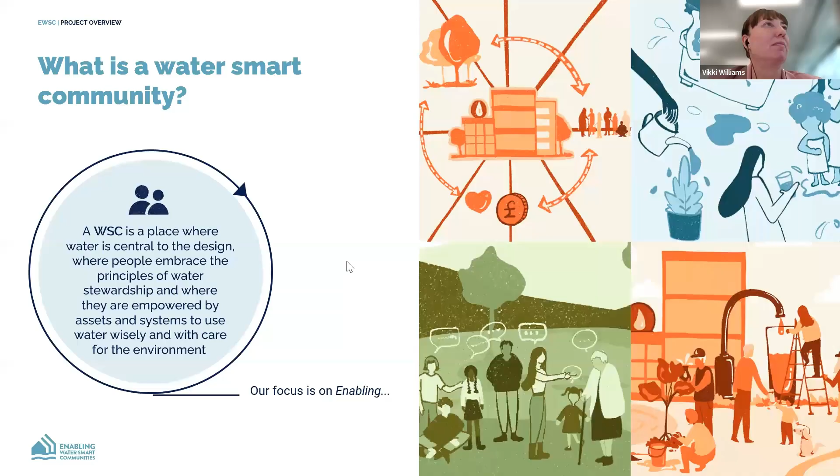I always want to say what is a water smart community, and it is about placemaking. And what we want to do is to ensure that water is central to design and how we embrace the principles of water stewardship in new housing development, and that we can get empowerment across the assets and systems. We want people to use water wisely, and we also want to take care of the environment. And the focus of the work we've been trying to do is on enabling. So this project has also been setting out the direction and action that we want to take to ensure that we can get water smart communities happening through the whole of England and Wales.

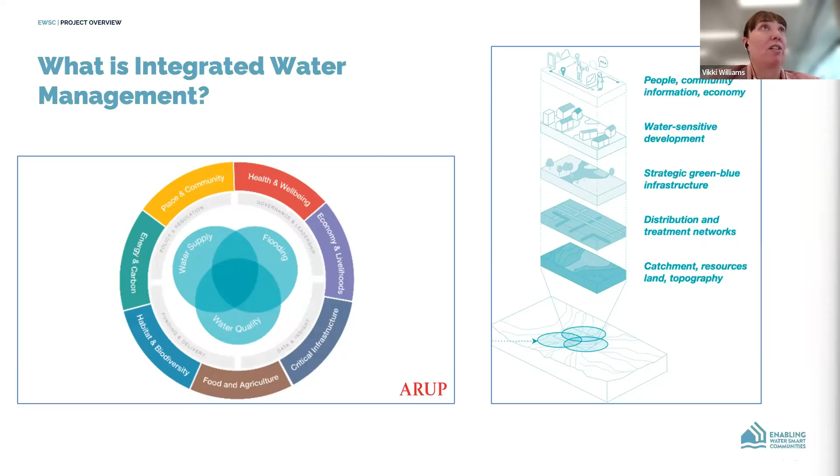The session today looks very much at the distribution network system here, and it's often the hidden and unloved part of the network, but we want to bring it out and give it the most love and say, why should we look at the new future of design in water networks and wastewater networks? Because lots of our talk is about how we must be much more water efficient, and we can't have water efficient homes that are going down to very, very low efficiency without completely looking at the design of our networks. And that's the aspiration of the project. And now I'm going to hand over to Olivia to talk about the work that we've done.

Yeah, hi everyone. Thanks for coming. So I led the first phase of this work that was based around sewerage, and that was concluded about 12 months ago. And then Liliana will talk about where we've come since then.

So next slide, please. So I'll start with the problem statement that we were tackling. So we know that widespread water efficiency measures will impact wastewater quality, wastewater composition, solids loading, nutrient loading, wastewater temperature, but those planning water efficiency measures have little understanding of the impacts that this will have on sewerage infrastructure downstream. So that includes things like blockages, stagnation, treatment efficiency.

And so the tools and knowledge for assessing these impacts have been made available through academic research, but we found that it was not in a form that would make it easy to use by the water industry. So that's what we were really aiming to solve with this project. So we aimed to solve this by making the existing research and tools more accessible, working with users to ensure that the tools delivered actionable insights that could really help them do their jobs well.

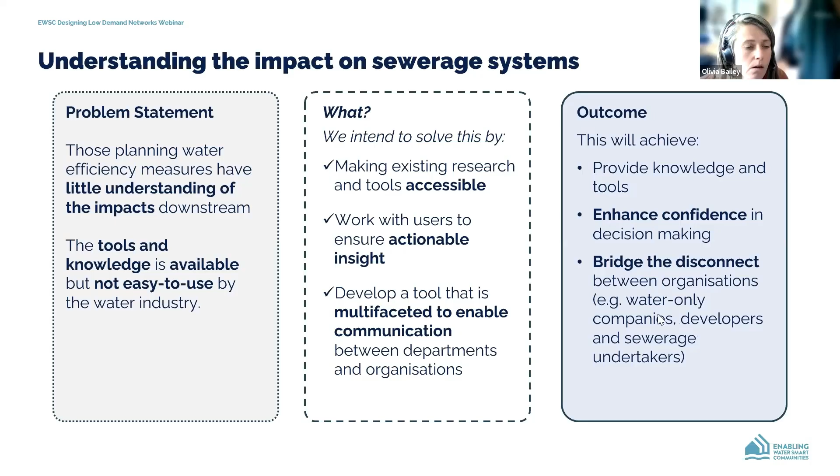So we had three main outputs from the ARUP work streams on this. We also worked with Thames Water, who worked more on the treatment efficiency impact, but these were our work streams.

Firstly, we produced a pamphlet that serves as an easy access guide to the existing research on this topic, so that's really the gateway if you're new to the topic. Then we also produced a network model that's open source - this was the conversion of an existing tool that was in MATLAB. Obviously MATLAB needs an expensive license and might be difficult to use for some people, so we converted it into Python, which is freely available open source software. I'll talk more about that later.

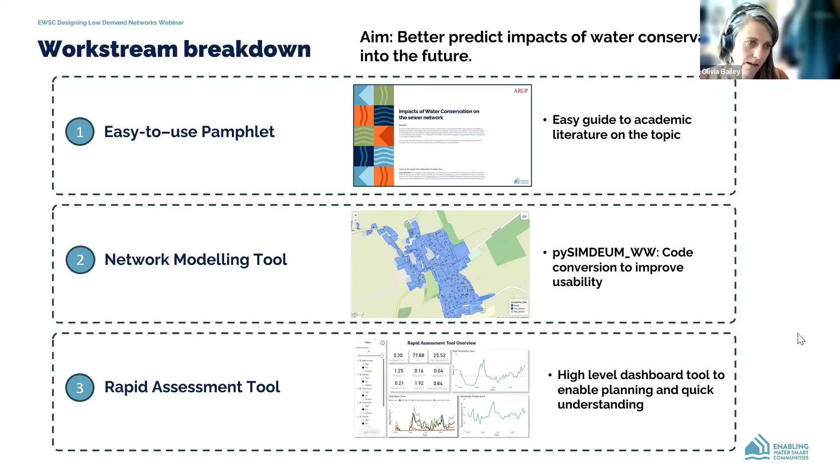And then we also created a rapid assessment tool for high level assessment of this issue. So it's a static output of the first tool, but for people that may not be modelers by background.

So I spent my PhD exploring this topic and published 3 papers in this field. There are also many others who have published work in this space, including Liliana, who will speak next. But we realized that this knowledge was locked up in academic literature behind paywalls and not very accessible to practitioners. So this pamphlet provides a really accessible starting point to help users look at the impacts of water conservation on sewer networks.

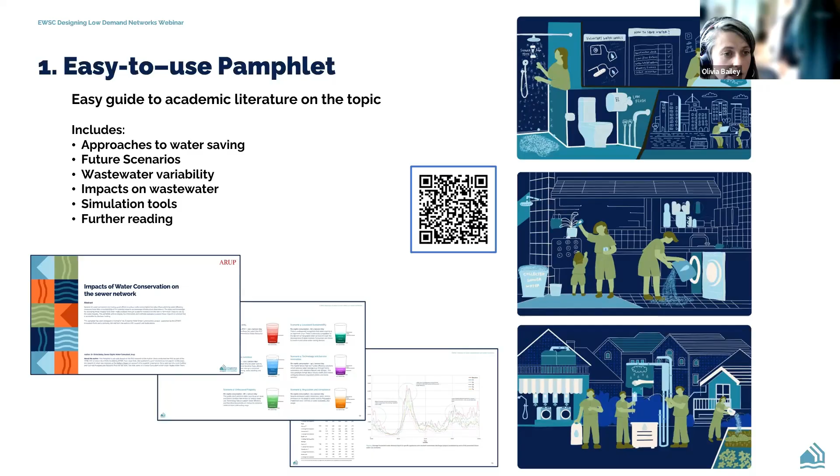This is just a little list of the sections included. We outline some approaches to water savings, look at 5 future scenarios, outline how variable wastewater is from different appliances with those scenarios, and then look at an example network to see what the impacts are on wastewater for those scenarios. It also has a section outlining the simulation tools I'll talk about next, and there's a list of literature for further reading. Hopefully this will be a really useful resource, and I encourage you to take a look. There's a QR code, and it's available on the Enabling Water Smart Communities website.

So the network modeling tool that we developed is called pySIMDEUM. It's basically the Python version of SIMDEUM, a software developed by KWR, a research institute based in the Netherlands. This originally was built in MATLAB, and it's a tool to simulate water use patterns down to very small temporal scales, down to 1 second, and small spatial scales, down to a single appliance. It's a bottom-up model for water demand - based on population statistics and the way people use water, it builds up a flow pattern rather than being based on monitoring in the catchment and global assumptions across populations.

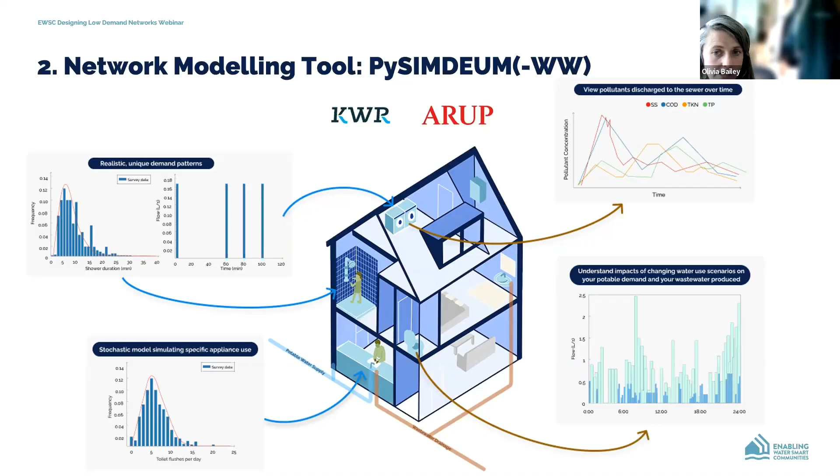For my PhD, I developed the wastewater extension to this software, SIMDEUM Wastewater, which allows the creation of appliance-specific wastewater discharge patterns. This is more accurate when looking at future changes, as you can target specific appliances - so you can look at the impact of switching to low flush toilets or low use showers, for example, and see how those specific appliances change your profiles. This software can form the input to network models - we used InfoWorks ICM, for example, to observe impacts in the network. As I said, these were MATLAB-based tools, and through this project we completed the conversion into Python, as well as some user improvements to make the tool more accessible for practitioners.

So pySIMDEUM is now available through GitHub, and it's completely open source, allowing you to simulate probabilistic water demand and discharge at end use level.

Based on population and use statistics, you can build and populate households suitable to your region or scenario. There's also some default data if you just want to play around. The model simulates flow down to an appliance level, so it can provide information on wastewater quality. For example, at 7 a.m., the primary water usage is everyone going to the toilet, and therefore water quality present in the network can be associated with usage at that time throughout the day.

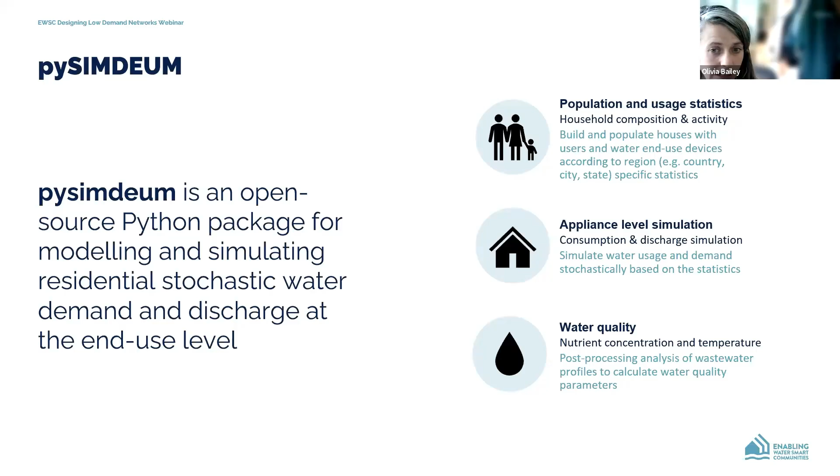SIMDEUM Wastewater serves as the input to InfoWorks ICM, or another network model if you choose, and the impacts can be viewed in the network.

We've developed functionality that can read in your shape files with specific population statistics and property groupings, and simulate catchment level flow patterns that match your data. So you don't have to go house by house. It can integrate well with your existing methods.

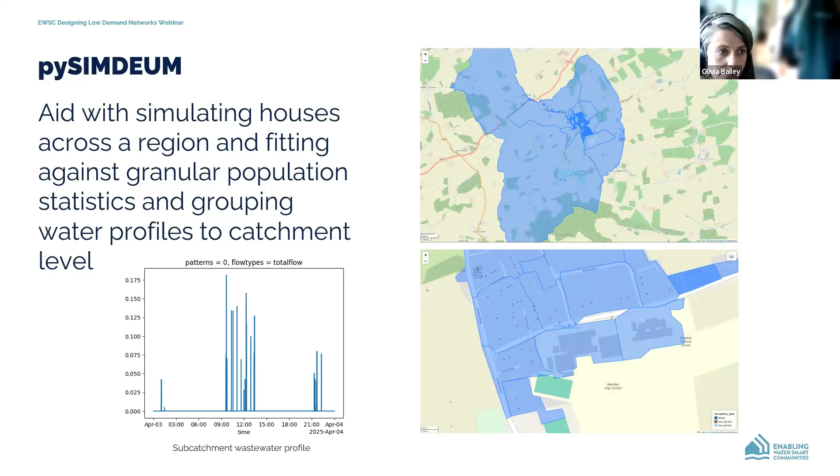The final tool I'll speak about is the rapid assessment tool, a high level version. It gives a high level overview of how reducing water use might impact flow in small developments. It's a simple dashboard tool that uses a static output of PySimDEUM that can be overlaid.

You can visualize key information based on what you're interested in. This tool is primarily to support go, no-go decision making and investigation without the need for in-depth network modeling. So you can quickly see how switching to 1 liter flush toilets, for example, would impact your flow pattern throughout the day.

It's intended for this tool to support pre-planning conversations between, say, a water company, developer, or water-only companies. Because we intended this tool for people who deal with water but might not be water professionals, we had to make it really easy to use.

The parameters we included were informed by user testing, so hopefully it includes really valuable parameters that can support the conversations and investigations these people need.

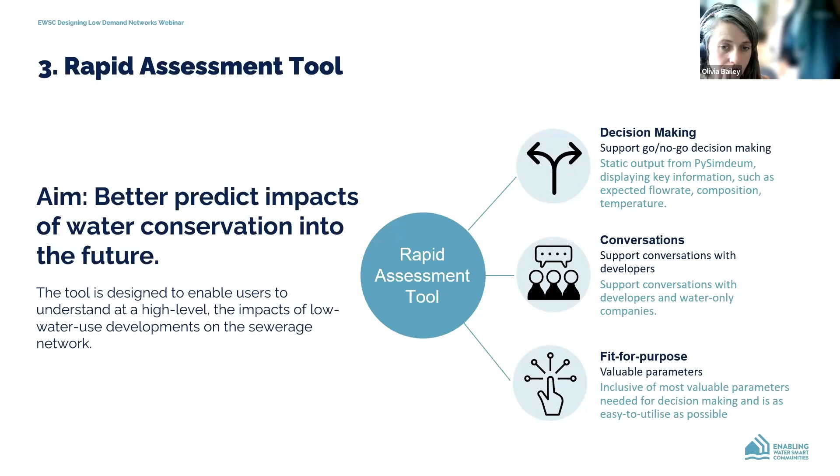This is my last slide, and it shows what the tool looks like. You can see we've created high, medium, and low impact scenarios for each household appliance. This means you can easily investigate impacts of changing appliances on your flow pattern, pollution concentration, and water discharge temperatures.

These three scenarios for each appliance were simulated with PySimDEUM, and there's a static output here in the dashboard. On the left-hand side of the screen there's a toggle, so you can choose for each appliance how dramatic you want your scenario to be.

So if you want a big impact on your shower flow, but leave your dishwashers the same, you can choose what you want to look at, and then you see that reflected in the profiles on the right.

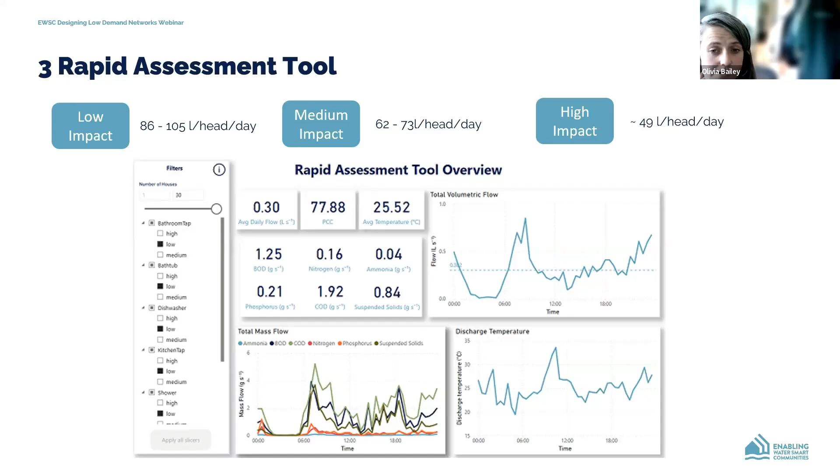Hopefully that gives a flavor of the three outputs from the first part of the project. As I said, they're all freely available on the Enabling Water Smart communities website, so please go and have a look.

Now I'll hand over to Ljiljana, who's going to talk a bit more about the recent phases of the project. Thank you very much, Liv, especially for explaining SIMDEUM and PySimDEUM. Now moving into the second part of this webinar, I would like to focus on designing low demand networks.

To start with, some quick numbers on the wider context. The UK is projected to face a major water supply gap by 2050, a gap of 4 to 5 billion liters per day. Climate change is also expected to put significant pressure on summer river flows, especially in already water stressed regions such as South and East England. On the other hand, around 1.5 million new homes are planned by 2029, and many of those are actually going to be built in already water stressed areas.

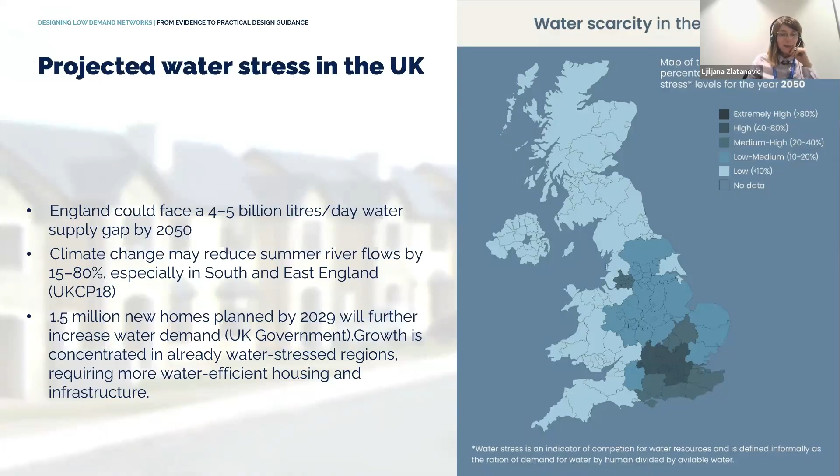So the mathematics is not that difficult. We need to save water somehow. One of the most effective ways to close this future supply gap is actually reducing household water demand, because homes represent the largest controllable water use sector.

At the moment, households in the UK use 140 to 155 liters per person per day. There is also a new UK policy aiming for a 20% reduction in household water use by 2037, meaning homes will use less water than today. That's positive for water stress regions, but it creates an important engineering challenge, because our drinking water and sewer systems are currently designed assuming much higher flows. The key question becomes: how will our infrastructure perform when demand becomes significantly lower?

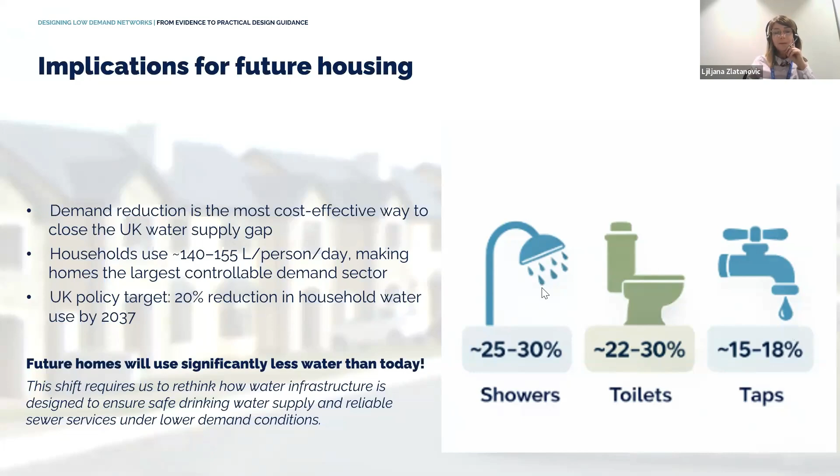So to address that question about how our infrastructure will perform, this project followed four main steps. First, we conducted a literature review on water conservation, looking at demand reduction, water efficient technologies, appliances, and future conservation trends.

Second, together with a wide range of stakeholders, we used knowledge from the literature review to develop future water conservation scenarios to be modeled. Third, we used hydraulic modeling to test how water networks behave under these current and future scenarios. And last but not least, based on the modeling insights, we came up with guidelines on how we should actually design low demand developments.

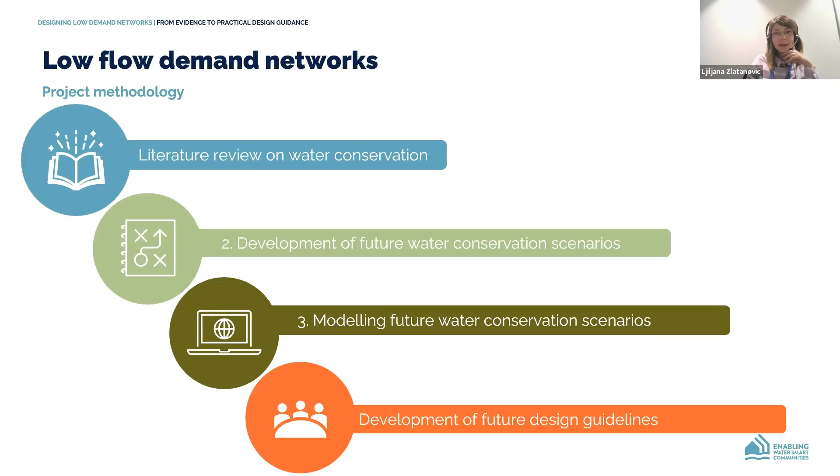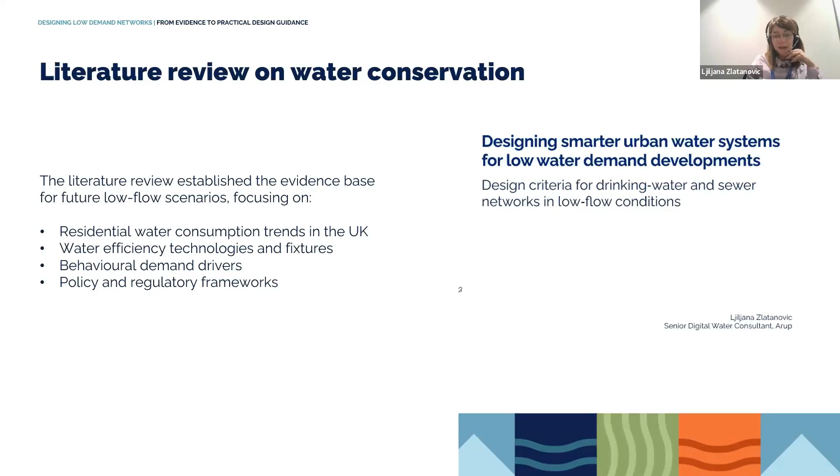The first step of the project was to build an evidence base. We reviewed scientific literature, but also industry reports, focusing on appliances and technologies like low flow showers, efficient washing machines, and dual flush toilets. We also touched upon behavioral drivers of water demand reduction, and reviewed policies and regulatory frameworks, including government targets for water efficiency and future demand reduction. That review helped us define future demand scenarios together with our project partners and stakeholders.

Next, we examined how drinking water networks are currently designed. In principle, the primary goal of drinking water system design is to ensure adequate pressure at the customer, sufficient flow, and reliable supply, so continuity of supply, and that must happen under peak demand, like morning peaks or during fire events.

Typical design assumptions include maintaining a minimum pressure, a legal minimum of 10 to 15 meters, at the customer connection. In terms of velocities of water in the network, it's very important to maintain at least 0.3 meters per second so that networks have this self-cleansing capacity and ability to prevent brown water events. This criteria has worked very well, and we need to follow it so that we have enough water, but also wholesome water.

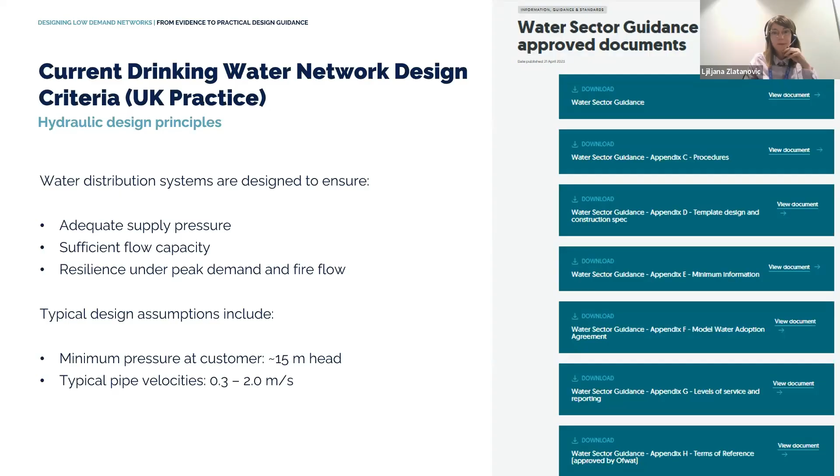Similarly to the drinking water networks, sewer networks are also designed based on certain hydraulic principles. In principle, gravity sewers are designed to ensure that sewer water can be conveyed effectively without causing blockages and surcharging. The key concept, as with drinking water networks, is to have self-cleansing conditions so that flow is strong enough for solids to be transported, preventing sediment deposition and further problems.

Typical design assumptions include foul flows of around 4000 liters per dwelling per day, and a self-cleansing velocity of at least 0.6 meters per second. In line with that, sewer networks also need an additional parameter, called shear stress, to be within a certain threshold range.

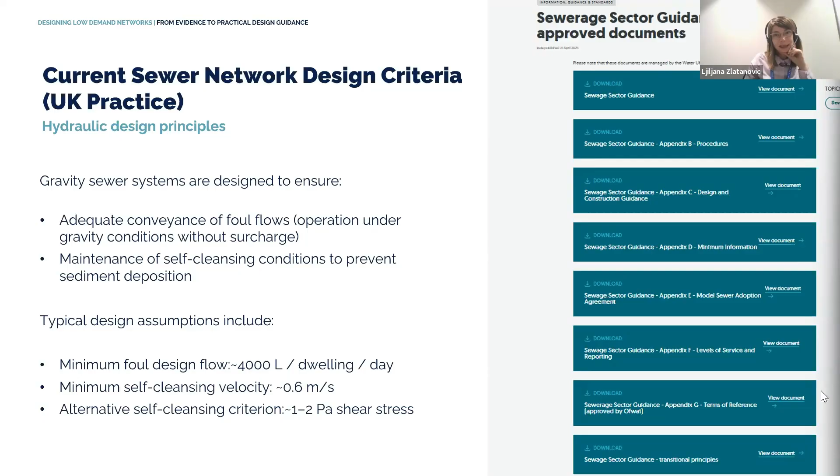What does research show about possible challenges in lower flow networks? There's a lot of research on this topic, and actually lower flows in drinking water networks can lead to several operational challenges with lower velocities. You can also increase the risk of sediment deposition. Resuspension of the deposited material often occurs when a certain threshold is met.

Water quality deterioration, according to research, significantly increases when water age exceeds 24 to 48 hours, and typical decay rates of chlorine per day can increase with this kind of issue. Last but not least, biofilm growth - that slimy layer inside the pipes - increases significantly when velocities are lower than 0.1 to 0.2 meters per second.

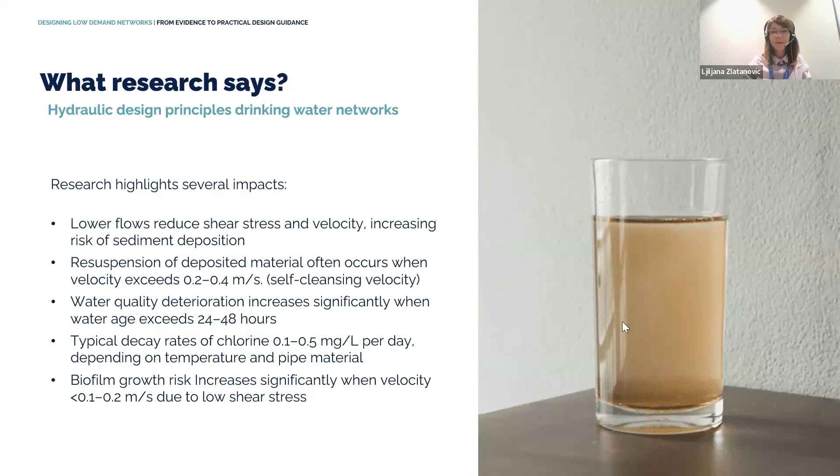Similar challenges exist in a sewer system when flow decreases: both velocity and shear stress decrease as well, which increases the risk of deposition, and over time that can lead to blockages and maintenance issues.

If the slope is too flat, solids settle, which can lead to many different issues. So in conclusion, flat pipe gradients and oversized pipes can further amplify operational problems in low flow developments.

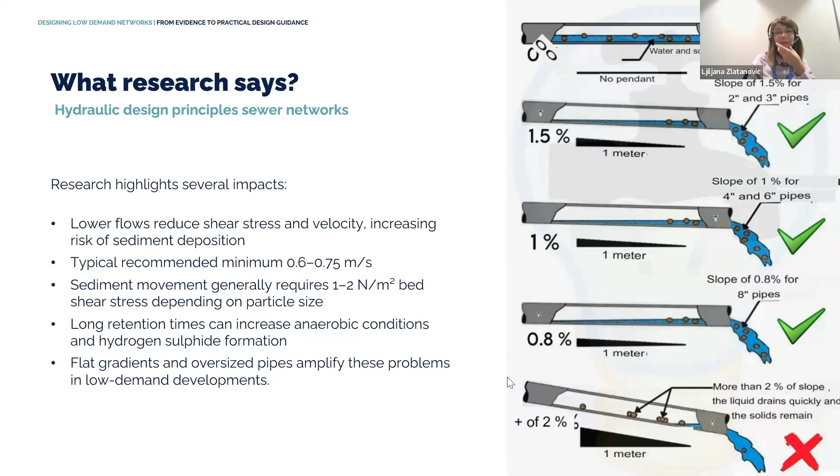Based on this literature review, together with various experts from various fields, we organized a workshop in order to develop realistic scenarios to be modeled, to explain it a bit.

Normally in research we see very extreme water saving scenarios, but with this workshop we aimed to align on realistic scenarios to be modeled. Basically, we came up with three different scenarios.

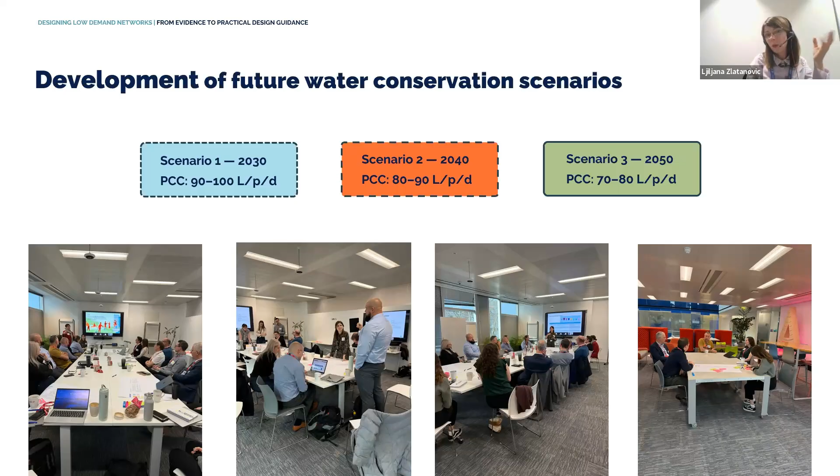The first scenario represents the near future, with per capita consumption of 90 to 100 liters per person per day. The second scenario represents a timeline around 2040, with consumption between 80 and 90, and the lowest scenario is a demand drop of 70 to 80. With these scenarios, we were able to test how water hydraulics performs under lower demand conditions.

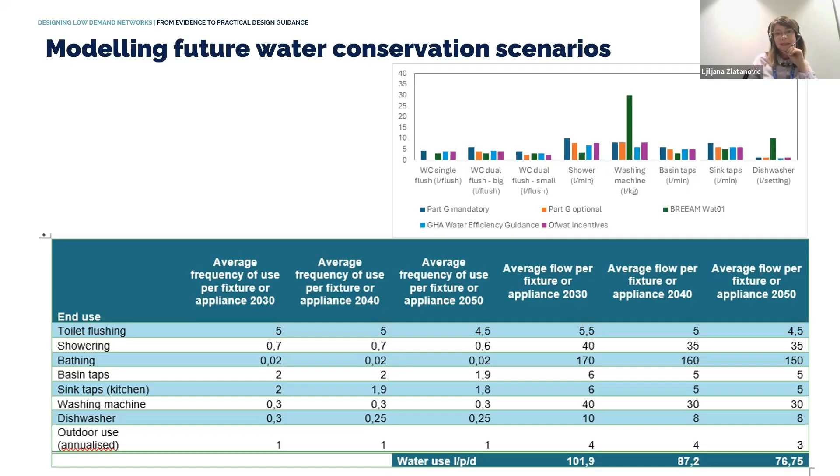Once we developed these three different scenarios - 100, 90 and 80 - we tweaked the pySIMDEUM code, and were able to connect the drinking water model with the sewer model.

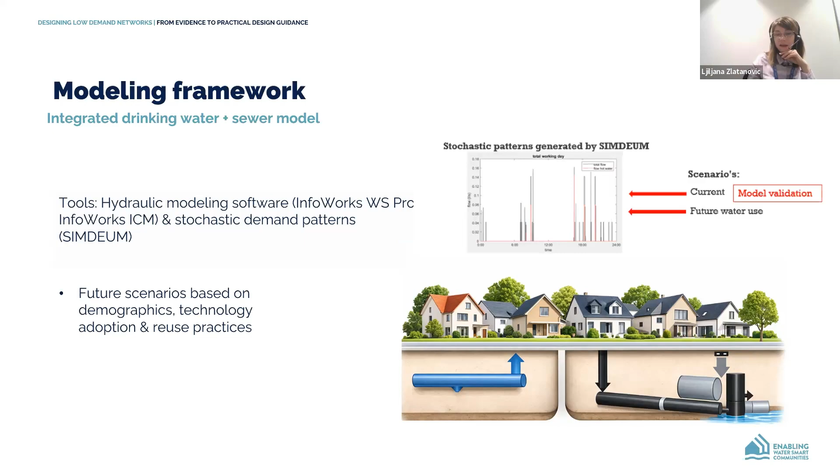For hydraulic modeling, we used software called InfoWorks Water Supply Pro, and for sewer modeling, we used a software called InfoWorks Integrated Catchment Model. At the heart of the system are demand patterns developed by SIMDEUM.

To assess low demand conditions properly, we had to tweak the models a bit, because the models we received from Anglian Water were not detailed enough - they didn't include customer points, but rather aggregated water demand.

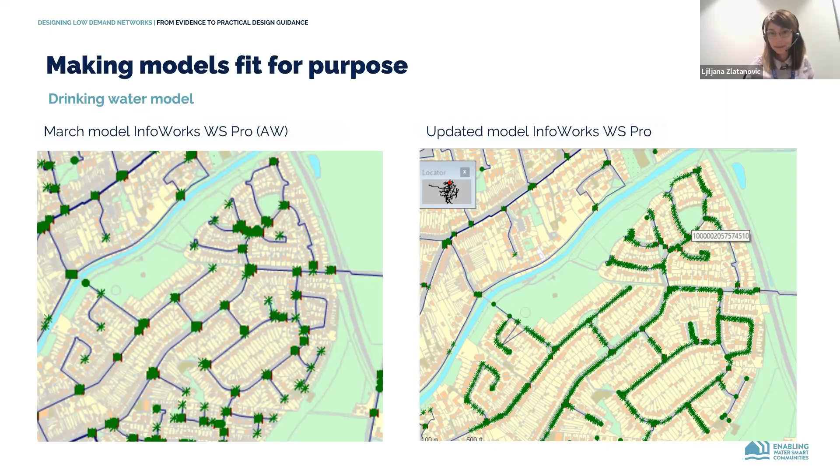A similar approach was applied to the InfoWorks ICM wastewater model. The original model contained large aggregated subcatchments, limiting the application of pySIMDEUM. We manually added around 850 property-level subcatchments to better model and use SIMDEUM, which allowed us to assess low flow impacts in the sewer networks in greater detail.

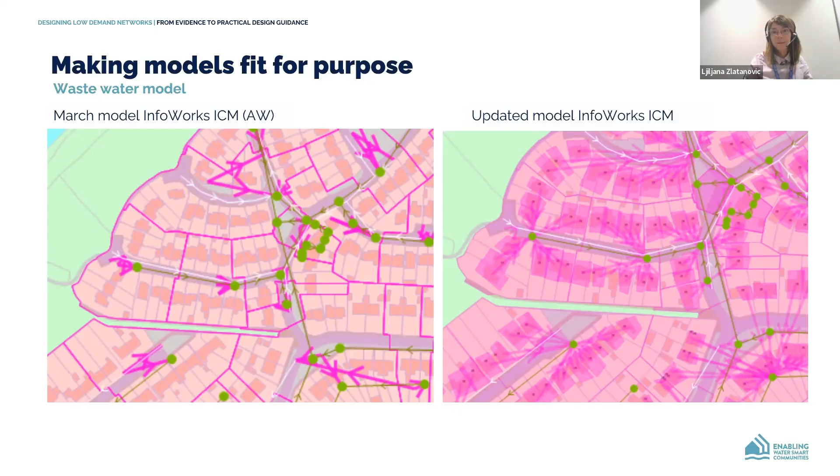Before analyzing, I'll just walk you briefly through this. I have 10 minutes - no, 20 minutes more. I think it's minutes, Ljiljana. Oh, it's 10, sorry. We're 5 minutes over, okay.

Before analyzing future scenarios, normally when dealing with models you need to see whether the models perform well - as we say, all models are wrong, some of them are useful. So we compared the Anglian models with the models we made for SIMDEUM, using patterns and consumption patterns of 150 liters per capita per day.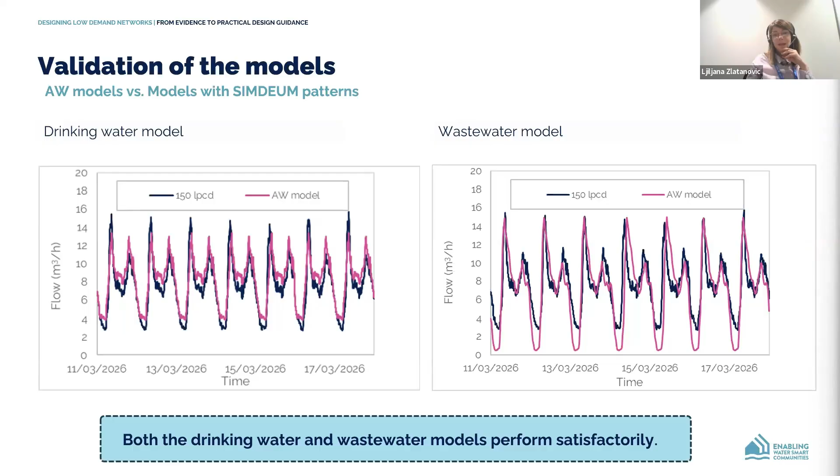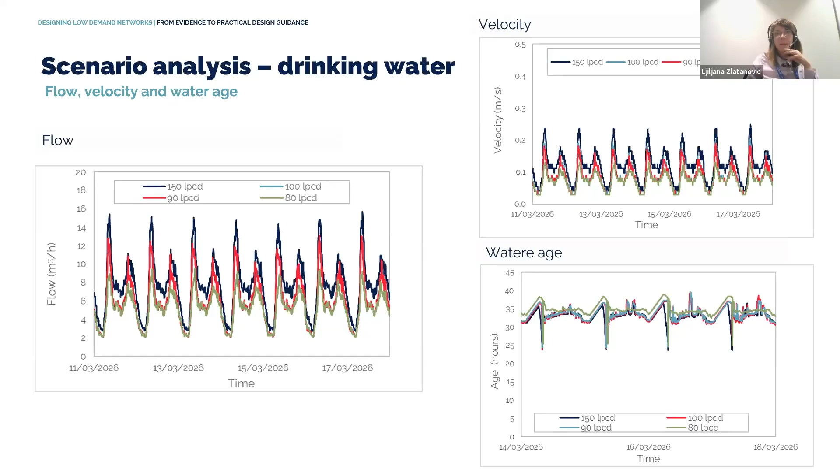So as expected, lower demand reduced overall flows and velocity throughout the network. Velocity is shown on the right-hand side picture. What we also saw is that water age increased because of the lower flows. Those changes became more pronounced in the lowest scenarios, and that may indicate increasing operational and water quality challenges.

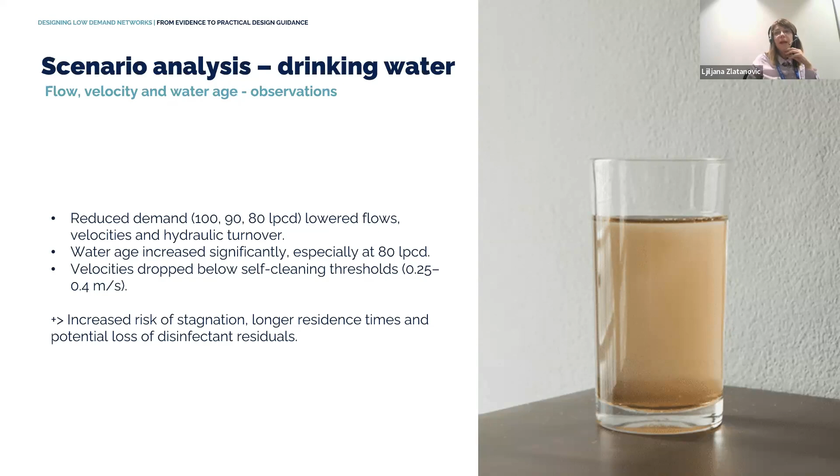So basically, the scenario analysis shows that reducing demand lowers flows and pipe velocities across the network. Under the lower demand scenarios, velocity falls below the typical self-cleansing threshold, and water age rises considerably, and this creates various operational risks.

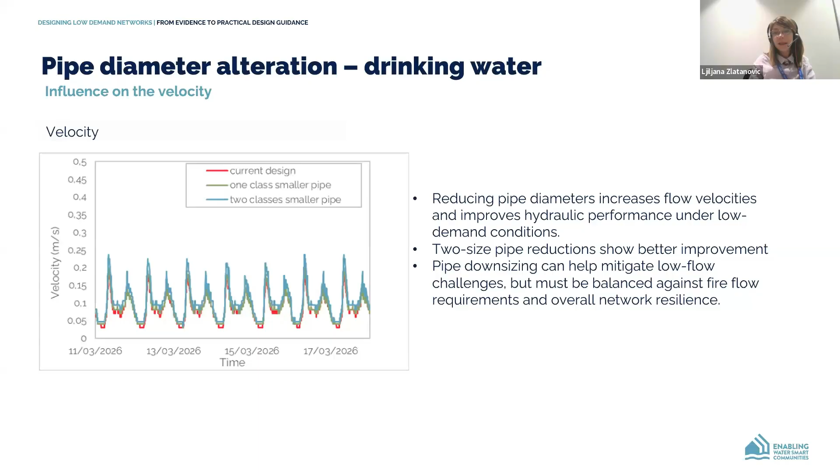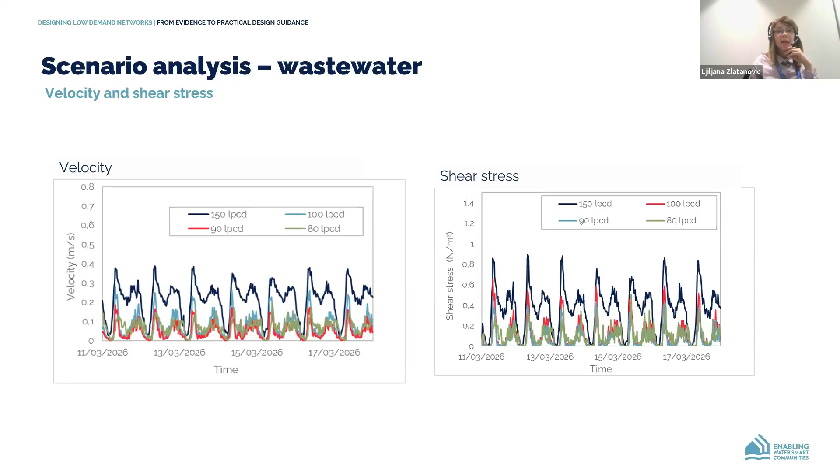Similar scenario analysis was carried out for the wastewater network under low flow, low demand scenarios. Again, as demand decreases, velocity decreases, shear stresses decrease, and this is more pronounced at the lowest, 80 liter scenario. In principle, the results indicate that future low flow conditions could create operational challenges for sewer systems because of lower velocities and shear stresses.

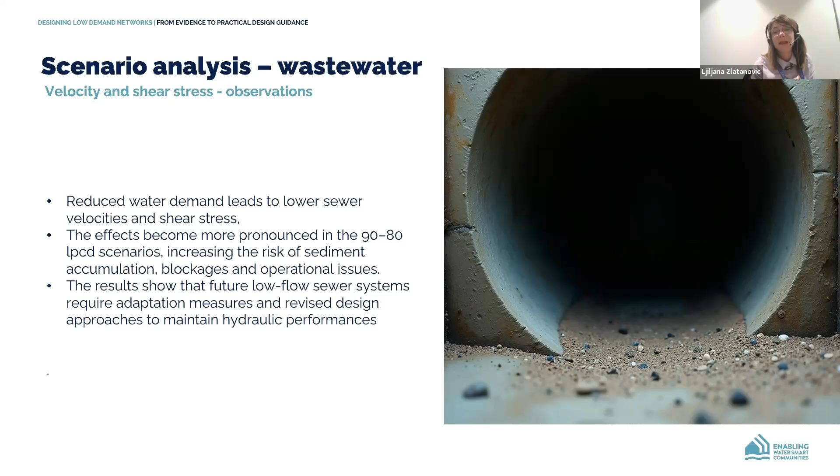There is an increased risk of sediment accumulation, blockages, or maintenance issues, and that is probably more pronounced under the lowest scenarios. In principle, this suggests that there must be a change in how sewer system design is approached.

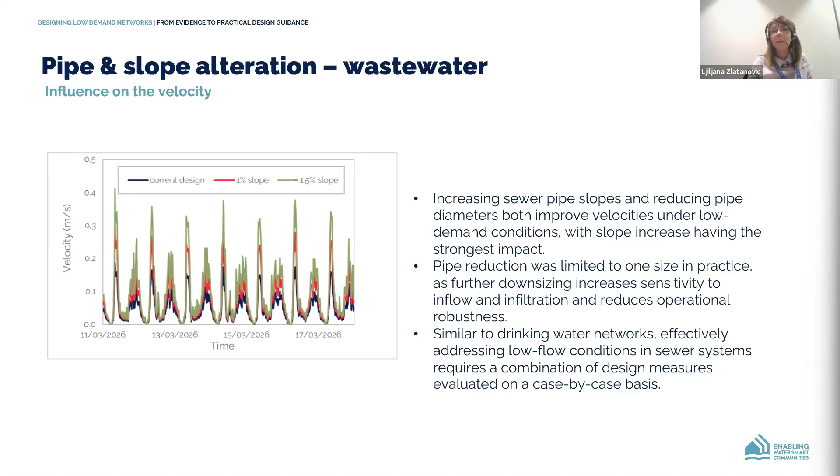To conclude: reduced water demand fundamentally changes the hydraulic behavior of both drinking water and sewer systems. Lower flows lead to increased water age and lower velocity in drinking water networks, which might lead to bigger operational risks, including stagnation, sediment accumulation, and potential quality deterioration.

In principle, the modeling shows the same applies for sewer, so that lower flows lead to lower velocity and lower shear stress. So that can also lead to operational issues. The modeling results show that measures like downsizing of pipe diameters and slope adjustment can improve performance, but there is no single solution or silver bullet that will work everywhere. So in principle, future low-flow networks will require more adaptive, integrated, and case-specific design approaches.

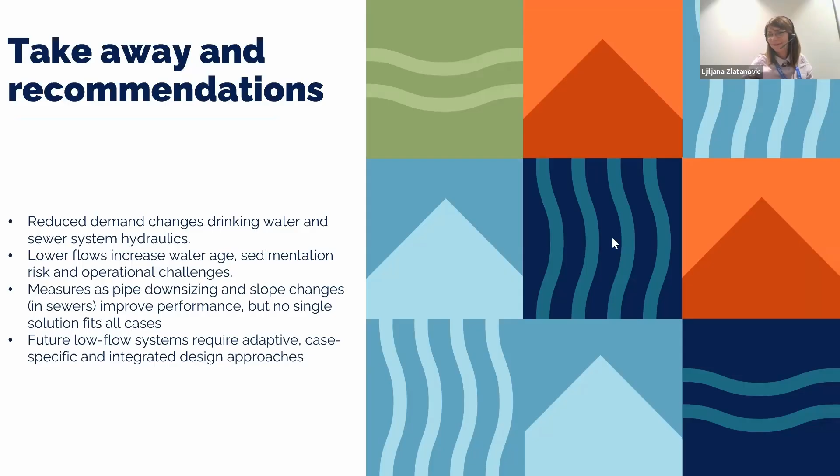So just over to me to talk about the next steps for enabling water smart communities before we move into the Q&A. With regards to the project itself, as Ljiljana mentioned, the report we'll be sharing with our technical steering group today, and following their review, we'll be looking to share that by the end of the month, alongside the link to this recording, which will all be on the Enabling Water Smart Communities webpage. So moving on to the next steps for enabling water smart communities.

As Vicky alluded to, the programme is coming to an end at the end of June, and we are going to be transitioning into a community of practice. This will build on the active group of stakeholders that's been grown through the Enabling Water Smart Communities programme to ensure that the delivery of integrated water management in all new developments is continued. The community of practice will be managed by CIWEM, the Chartered Institution of Water and Environmental Management, who have also been a key delivery partner on the programme.